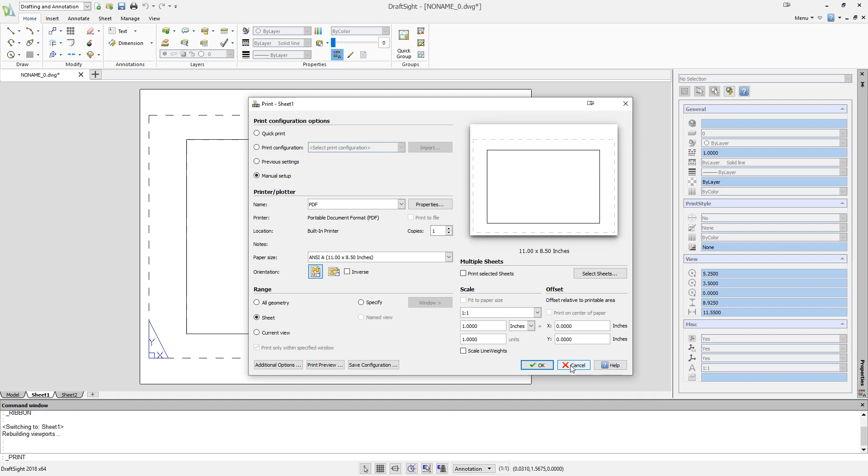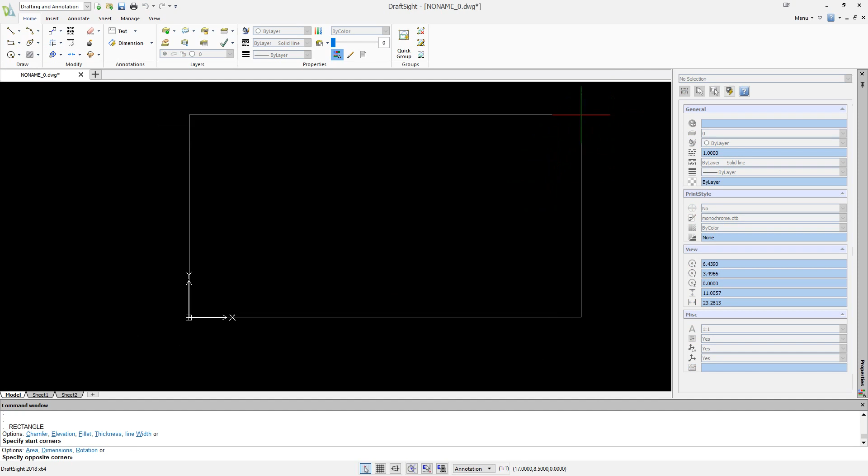Draftsight has this functionality where you can print multiple sheets. So that's what I use, and then I configure my sheets and my model space, and that can be a little tricky to get it to work correctly. So I'll just do an example for an 11 by 17 sheet here. And I'll make a few of these sheets. So I'll set up my model space, and then I'll set up the print configuration. And I'll show you how I set it up so that it works.

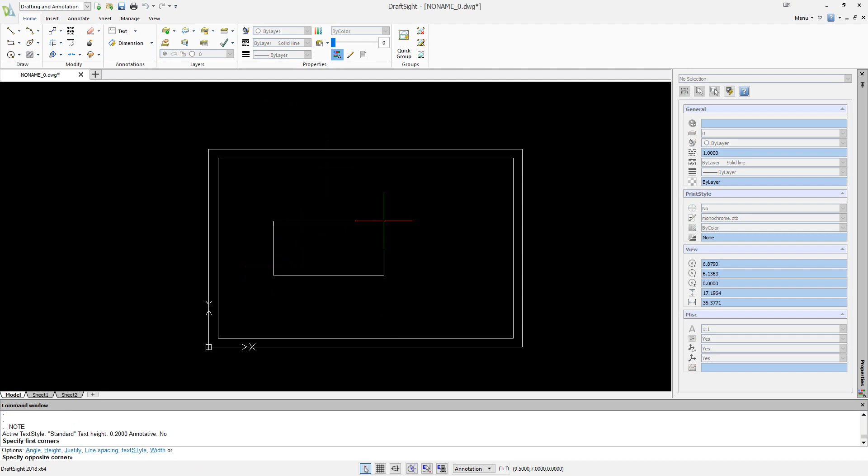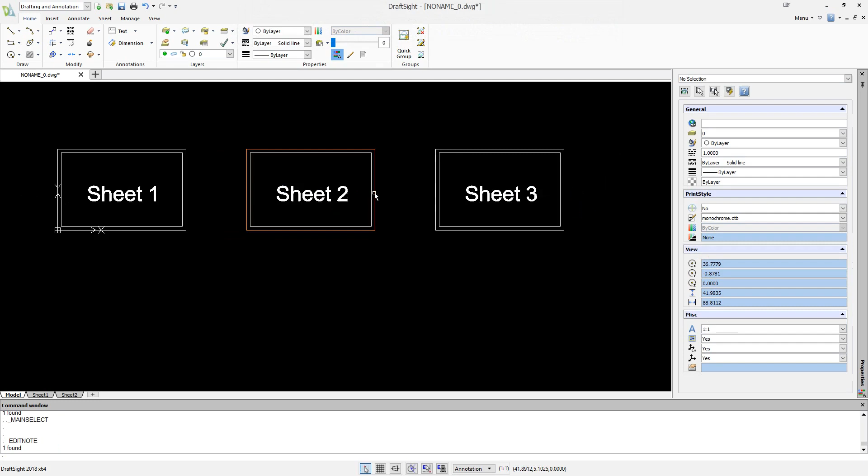So this rectangle represents my actual paper. It'll be 11 by 17, and then normally I'd have some sort of margin, and then my drawing inside, and some sort of template that I'm using. And once I have all of that set up, I'll just call this sheet 1. Sure. I would copy it for the amount of sheets that I'm going to need. So I'll just do three of these as an example, and I would do this for however many sheets I was going to use.

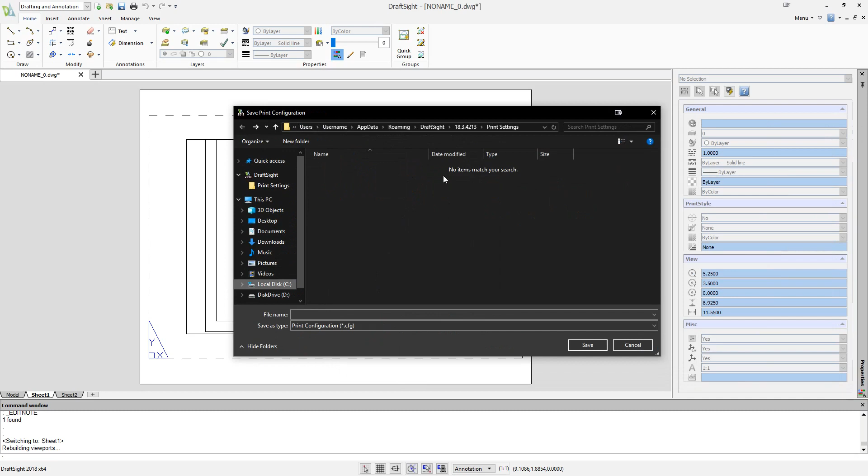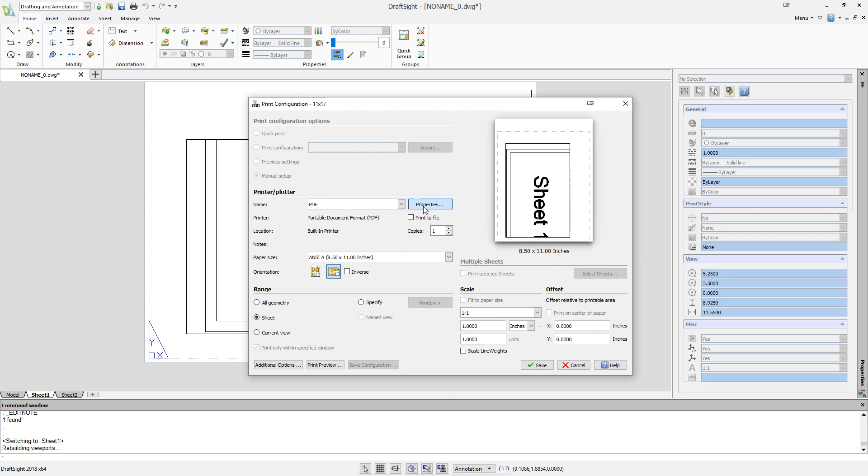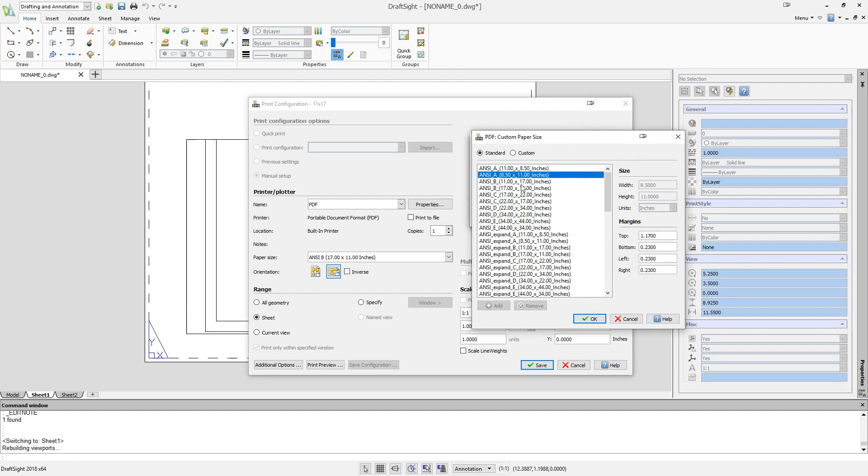And to set up the paper space, do this with a print configuration, and I'm going to create a new one. Yeah, it's going to be 11 by 17. Spinny wheel. And so this is going to be PDF, is the plotter I'm using. This is going to be 17 by 11. No margins, since I've used my own model space margin. And this is kind of important to get the origin of the paper and the print to work correctly. So you have to do that for the size of the page you're using. Orientation is this way.

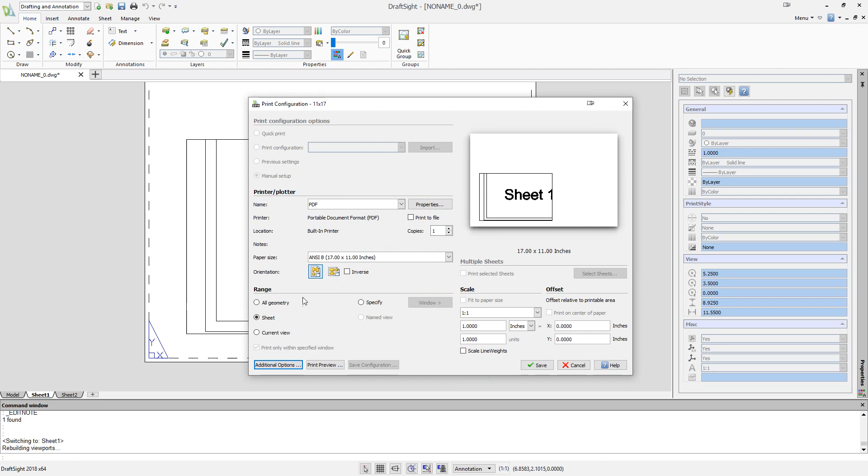Okay. One thing I usually do is I print in black and white, and Draftsight's not configured to do that by default. To do that, you have to do these additional options and change the print style table. And there isn't one for black and white, so I make one black. So I select every color and change it to black. So now any color will print in black, and you have to click this, use assigned print styles. Okay. So I think this is good.

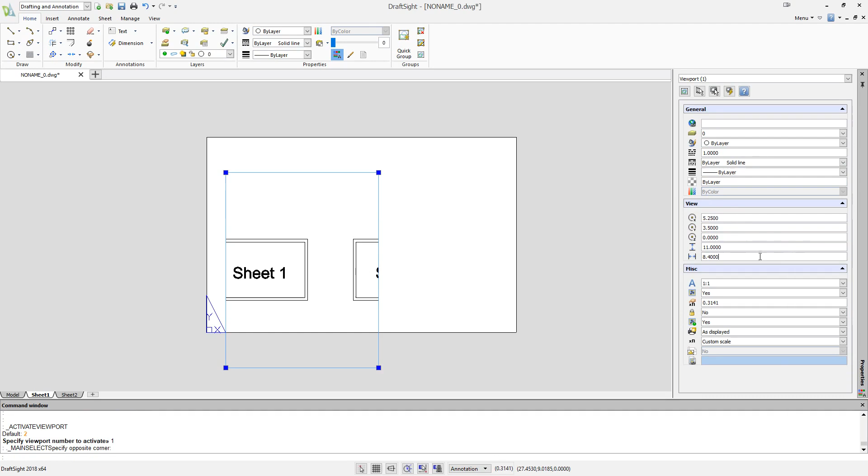My 11 by 17, my origin's at the corner of the paper, and next I need to get my viewport to be the same size as this. So I do that here using the properties, 11 by 17, and I want to match it up pretty close with the paper. And to get it exact, you just use these: 8.5, 5.5, and 11 by 17. So these are just the center of the rectangle, so that makes sense for an 11 by 17. So yeah, the rectangle's center, so x 8.5 because it's 17 over, and then 5.5 up because it's 11 total.

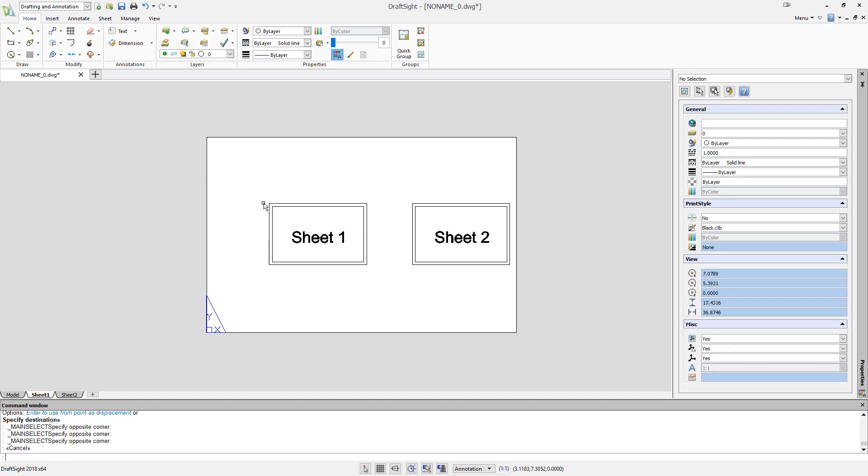Okay, next I want to line up my actual paper with my paper space outline here. So to do that, I select the outside border, and I zoom, nope, not zoom to fit, zoom to selected, and that centers my viewport onto the first sheet. And then I want to fix the scale. Right now it's 0.9804. I want to fix it to 1:1, and that sets that. So now my paper space is perfectly aligned with my model space, and I want to do this for 3 sheets.

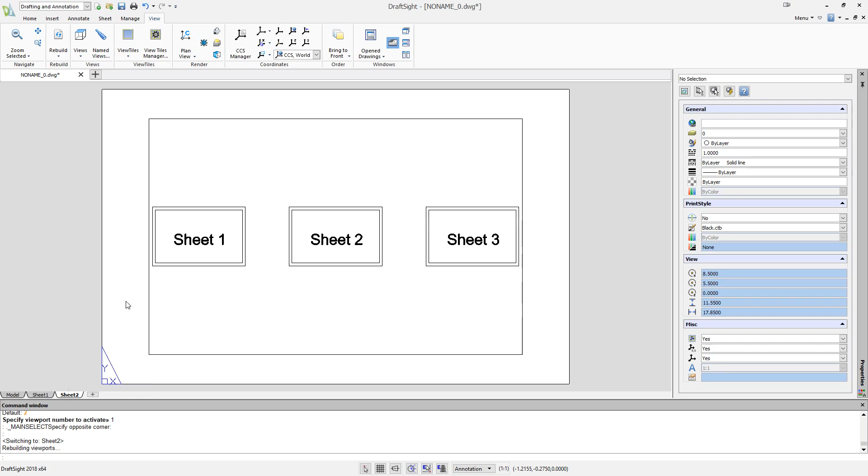I'm not going to use this one, and I want to copy this. So I've set this one up correctly, so just so I don't have to duplicate all that work for the other sheets, I copy them. So I'm going to have 3 sheets. It's going to be sheet 2. It's going to be sheet 3. And if you're going to go above 9, use the leading 0. So page 1 would be 01, 02, 03, and so on. Otherwise, the order that they print messes up.

And now you have to change these so that they're looking at the correct sheets. So that's zoom selected and change it to 1:1. Do the same for sheet 3. And so on for the amount of sheets you're going to have. And once I have this set up like this, I would usually save this as a template so I never have to go through and reconfigure this again. I would just use my 11 by 17 template.

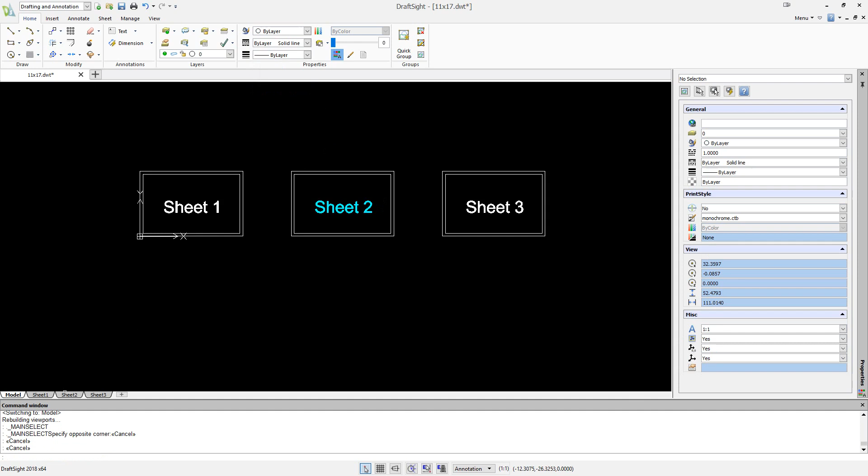Okay, yeah, let me change the color of this before I print it just to show that. So I'll go into the print. I'll select all of my sheets, create a single file, create a single PDF, and click OK. Example PDF. And okay, there's my 3 pages in black and white. And that's how I set this up. I like that it's 1:1.

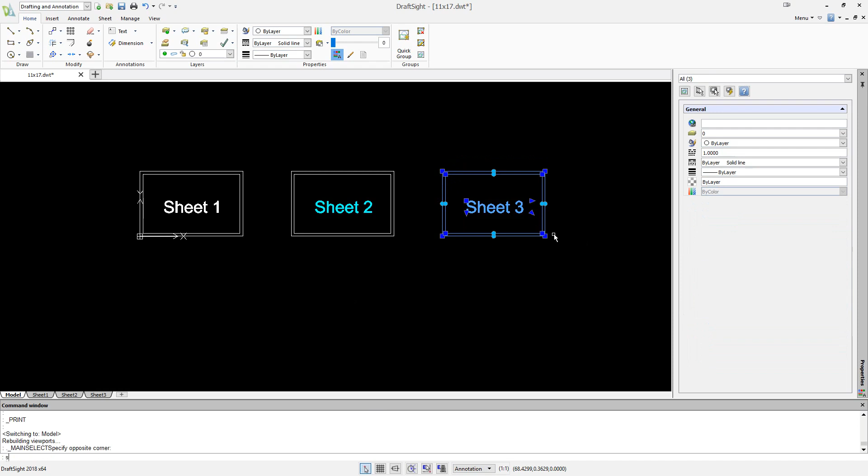If you're gonna use like a 2:1 or a 3:1, I usually just use the scale command and scale this up if I'm gonna use a 2:1 or a 10:1 or something like that. And then obviously you have to come back into the sheet and redo this so it lines back up. So zoom selected. And now I'm going to be, what did I do? I did 3:1. It's probably a bad choice.

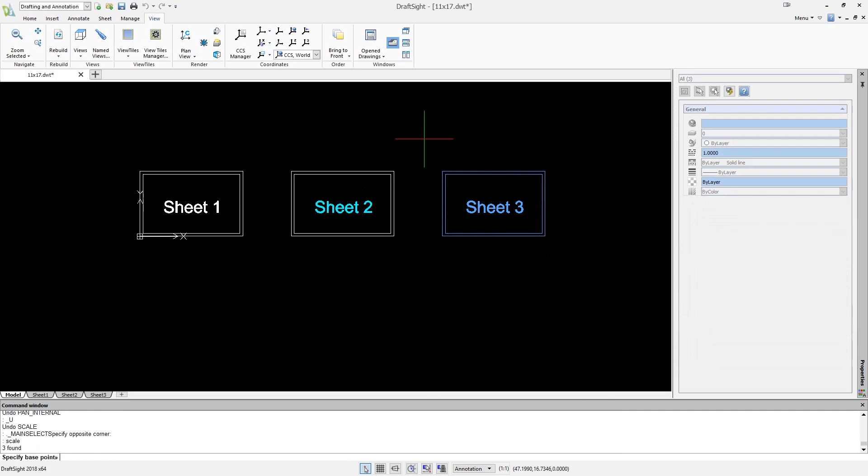Guess I can make a custom one. Let's just do 4:1. Scale factor of 4. So zoom selected, 4:1. Now this scale is 4:1. Okay, that's how I do multiple sheets in Draftsight.